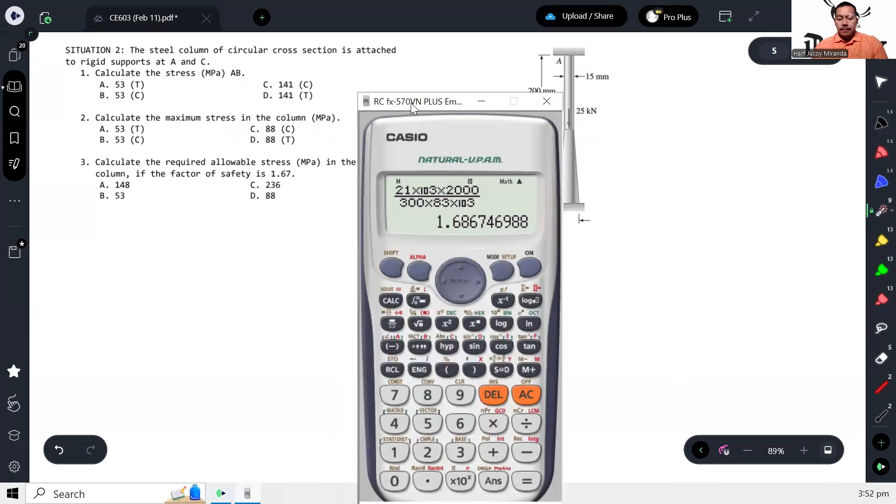You might think that the stress in AB is 25, because 25 is the force. 25,000 over the area of AB. Since diameter is given as 15, it's pi over 4 times 15 squared. That gives us 141.47 megapascals.

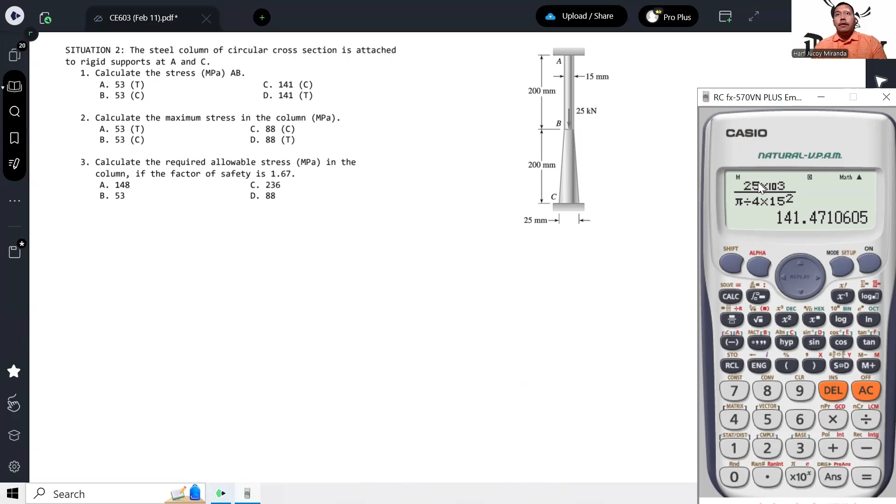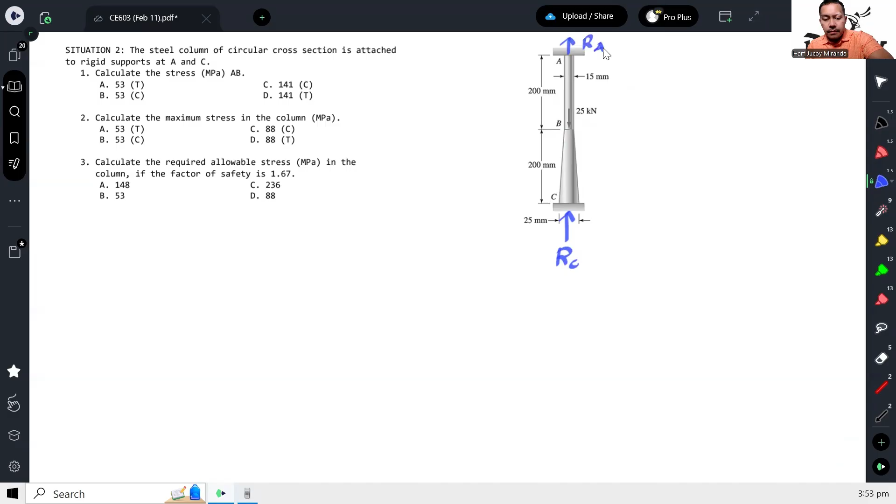First, calculate the reactions here, since it's fixed, we have a reaction here and a reaction there. If we compute summation of forces Y equals 0, we get that the reaction at A plus the reaction at C should equal 25.

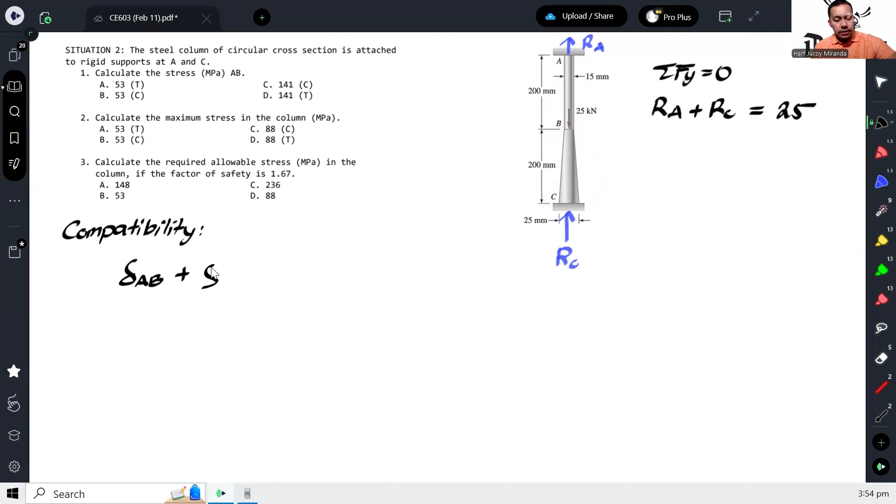Now how do I calculate the deformation at AB? The formula is PL over AE, where P is the internal axial force. To compute that, we cut the member and isolate the upper part.

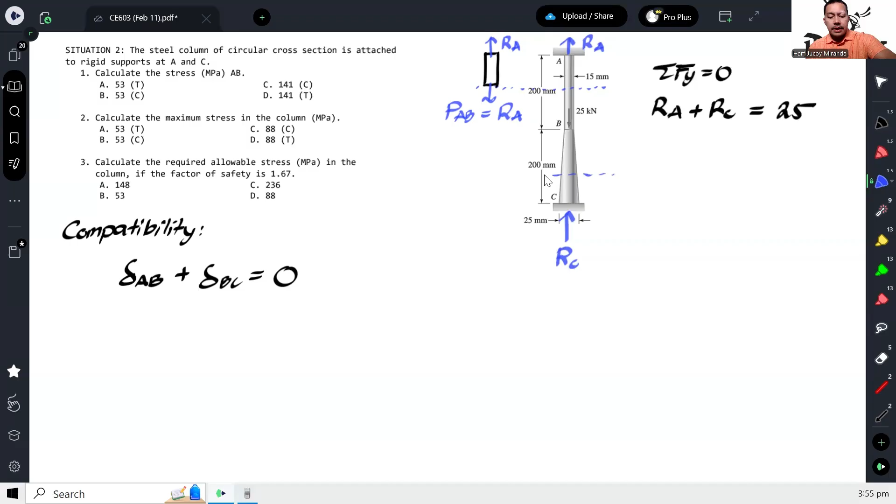So we know there's a force here, reaction RA, and also 25 here. Now there's an internal force here too. What I would do is assume that the larger one is the 25, so the reaction or internal force for BC would be upward, giving us 25 minus RA.

So if we notice, this member will be subject to tension while this member will be subject to compression. Therefore, this should be assumed negative.

Now, how do I compute the deformation at AB? Again, as we said, PL over AE. Our P for AB is RA, and our L for AB is 200.

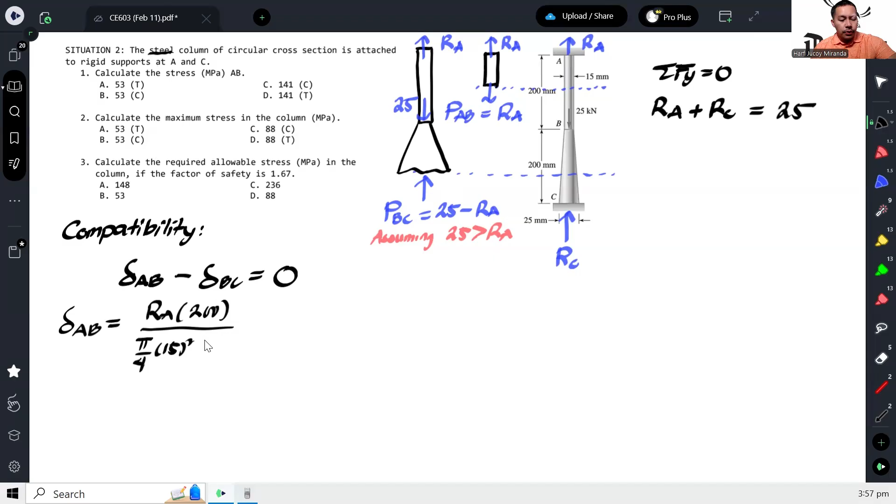The area is pi over 4 times 15 squared since the diameter is given. Then our E, since it's steel, is automatically 200,000. So that gives us the deformation for AB.

What about for BC? Take note, the formula PL over AE is only valid as long as the member is prismatic. When it's non-prismatic, we can't use PL over AE directly, because the cross-sectional area keeps changing. So since it varies, we need to analyze it in a different way.

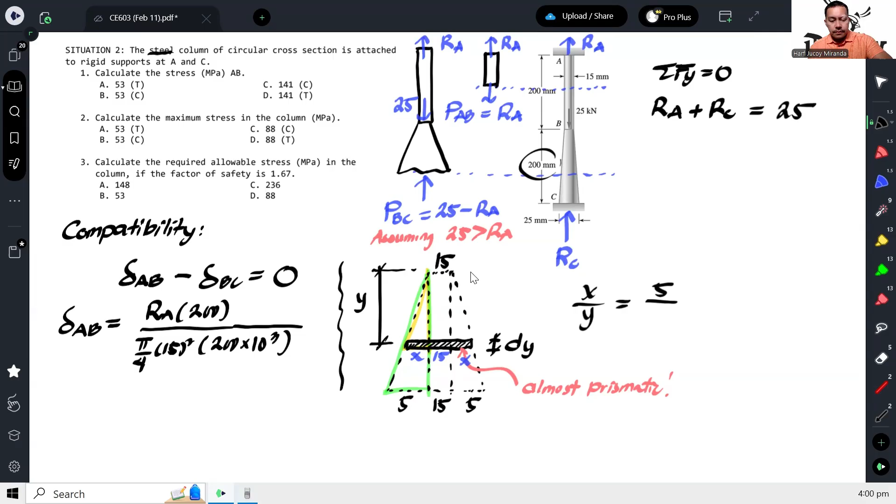X over y would be equal to 5 over - what's the total here? 200, right? Okay, so that's 200. So 5 over 200. Therefore it turns out that x would be equal to 1 over 40 of y.

The reason why I did that is because when we compute the deformation of this small element, this will be a very small deformation of member BC. So when I say very small, that means differential. And that will be equal to P - the P applied here is still the same, whatever is exposed here, that's still PBC.

That would give me 25 minus RA. Then our L will just be dy, over area. So our area now, if we define this diameter, that would give me 15 plus 2x, which is equal to 15 plus - since our x is 1 over 40 - times 2, that's 1 over 20 of y. Therefore our area becomes pi over 4 times 15 plus 1 over 20 y, squared.

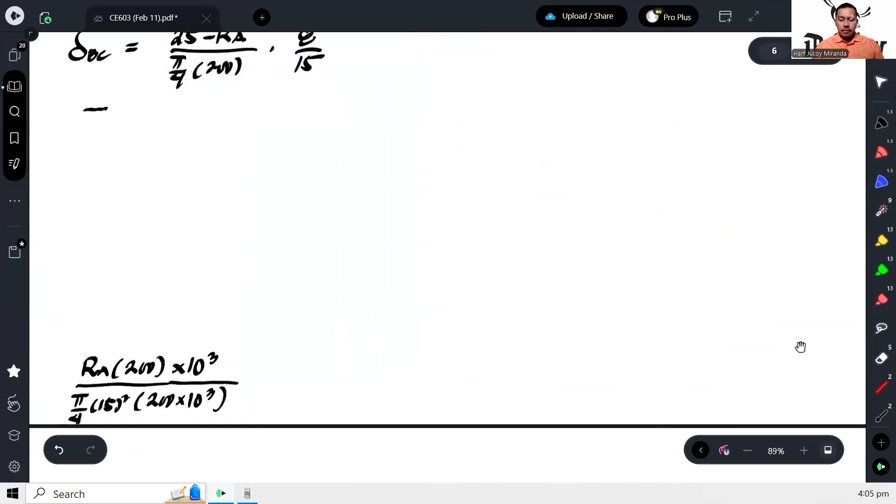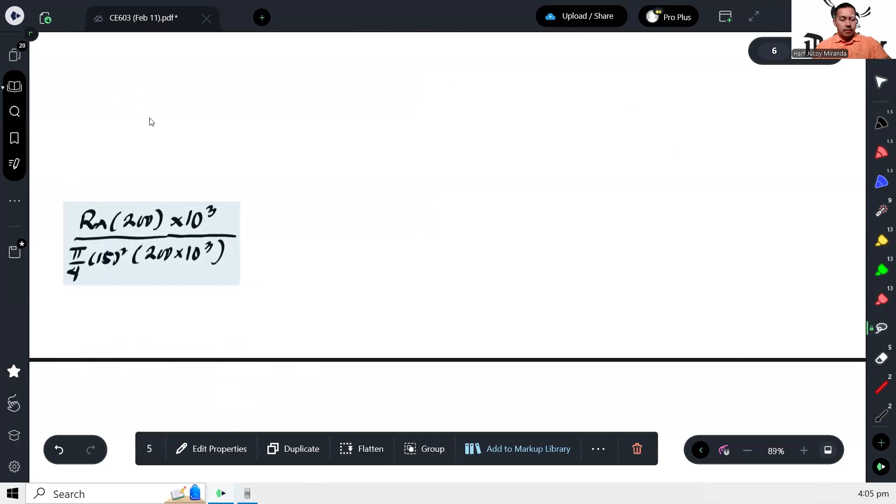Ito yung deformation sa AB. Ito naman yung magiging deformation sa BC.

Okay? We can cancel out itong pi over 4 na to para lang mabawasan. Itong pi, ito rin, we can cancel out. Ano pa? I think that's it. That's good enough. So we can now solve for the reaction at A.

Pwede natin i-cancel ng 200. Para silang may 200. Pag multiply mo ng 200 yung buong equation, mawawala lang mo. Ito na yun.

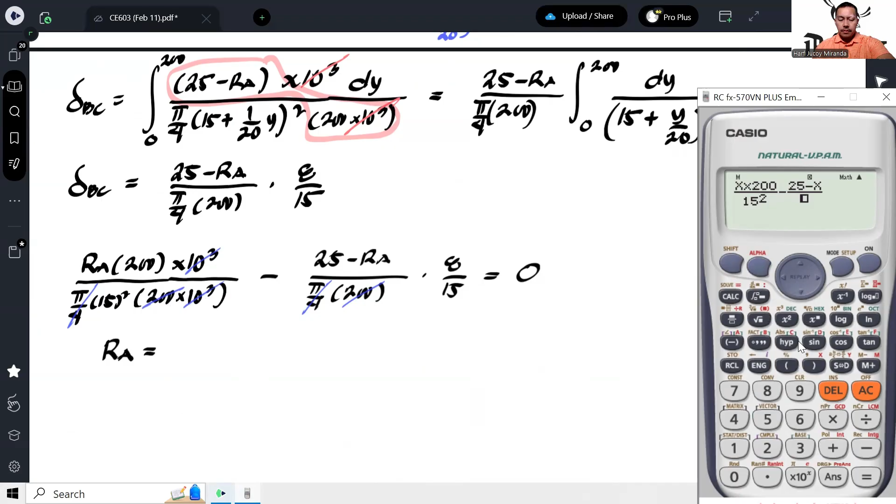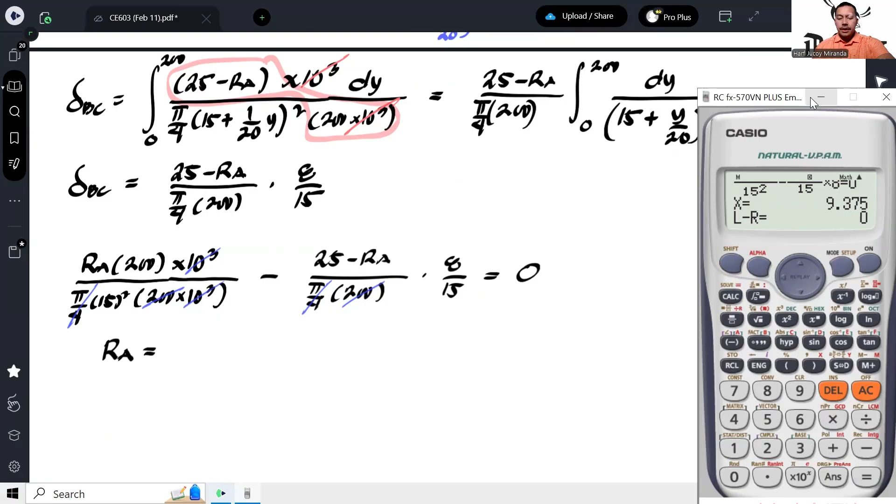Okay, and that gives us 9.375 kilonewtons. Ayan. Okay?

So now that we have calculated RA, we can now calculate RC. So since RA is 9.375 kilonewtons, then RC would be equal to 25 minus this, which is 15.625. Okay?

So now, to answer the question, what is the stress in segment AB? So ang stress natin doon is, ito bali sa AB, ang nag-a-act sa kanya na force, ito, which is yung reaction sa A, which is ito. So therefore, ang correct na reaction stress sa AB is 9.375 thousand Newton divided by area.

And that should be 53.05. Kaya lang meron dalawang 53. Okay? So ano ba ang nature ng 53 na yon?

So tingnan natin to. Di ba nakuha natin RA is 9.375 na positive. So ibig sabihin, tama yung assumption natin dito na tension siya. So this should be under tension.

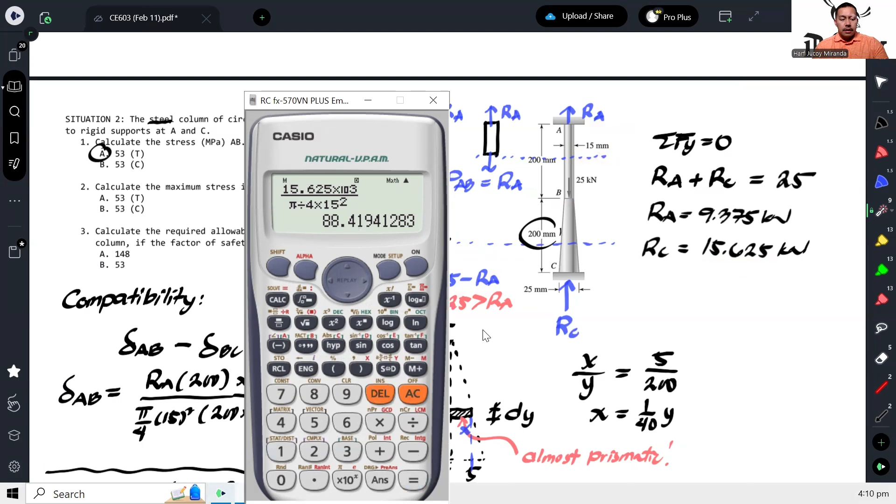So yung area na yon will have a diameter equal to 15. So that means this will be 15. Okay, and that is 88.4 megapascal. So ito dapat yon 88. And the nature will be under compression.

Okay? For number 3, calculate the required allowable stress in the column if the factor of safety is 1.67. So ano yung required na allowable stress given a factor of safety of 1.67? Okay? So first of all, kailangan para malaman natin kung ano required allowable stress, i-compare kasi natin initially dun sa maximum actual stress. Which is in this case, ang maximum actual stress natin is turns out na 88 megapascal.

No? So from that 88 megapascal, balikan lang natin, this is for number 3. Na pag sinabi nating factor of safety, so pwede dito ka mag-start eh. Ang factor of safety is yung ratio ng allowable stress sa actual.

Okay? Or you can also say na yung actual stress, no, ay equal or ine-equate natin sa allowable stress divided by the factor of safety. At kailangan ito laging mas maliit. Pwedeng ganyan, no? Less than or equal.

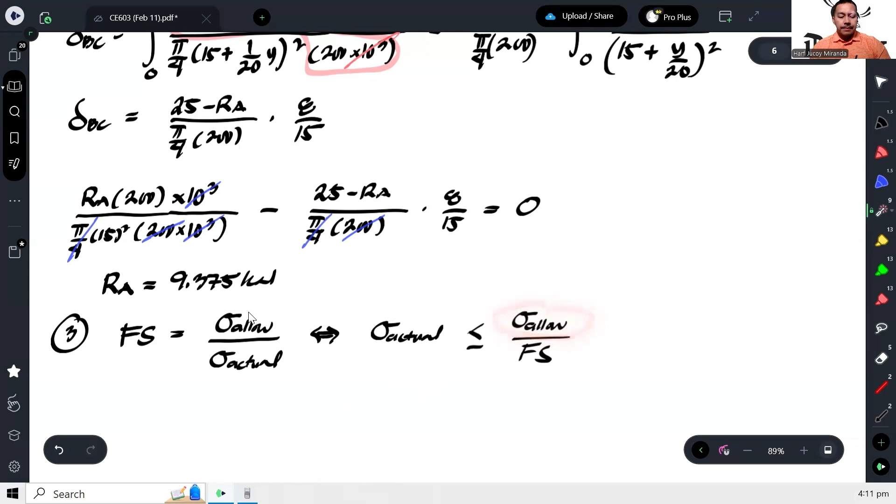Okay? So ngayon, ang lumalabas kasi, hinahanap natin, ano to? Hinahanap natin to. Okay? Pero meron na tayo ng actual. Ang actual natin na maximum, ito, 88. So, ibig sabihin, para makompute natin yung allowable na kinakailangan, that would give me factor of safety multiplied by the actual stress.

And that would give me 1.67 times yung 88 na na-compute natin. 88.42.

Therefore, the allowable stress would be times 1.67, 147.66 megapascals.

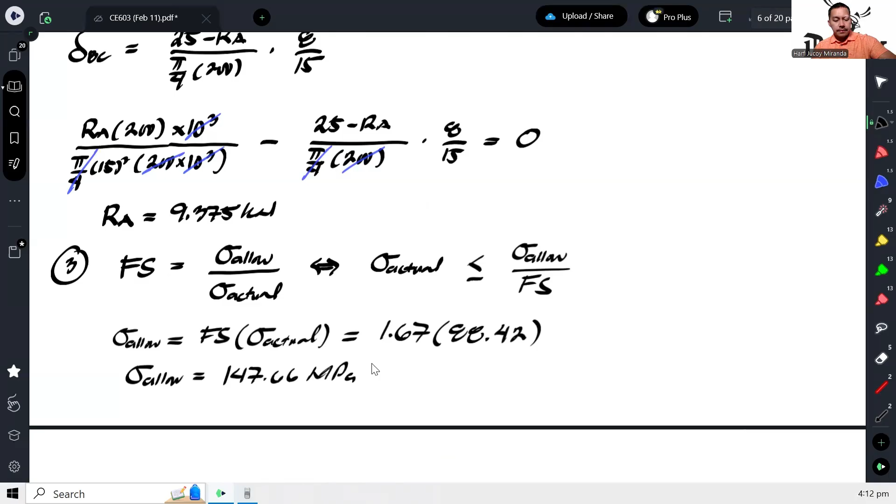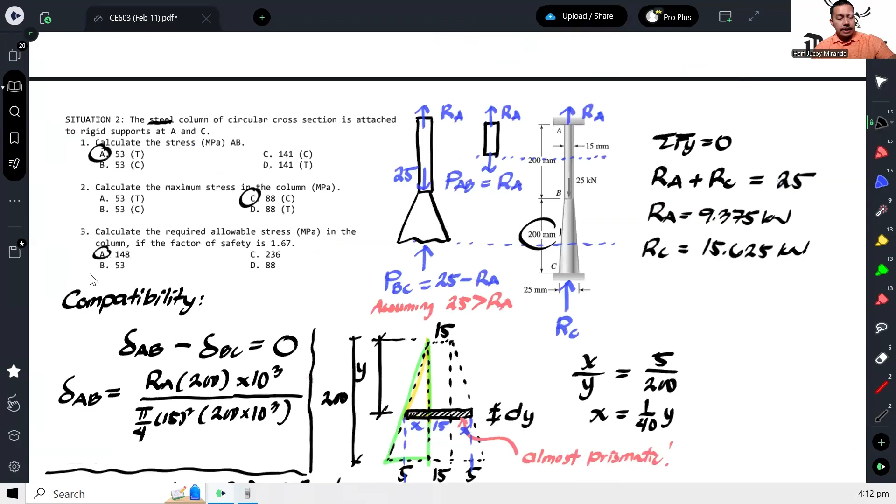Yan yung required allowable. Okay? We can just round this up to 148. Okay? And that's how we solve this particular example.